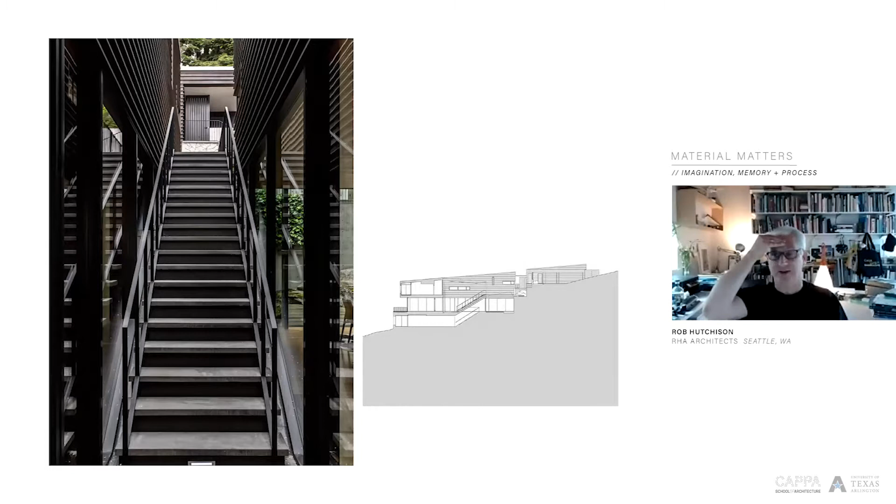As Pia mentioned, we've known each other for a long time. What I wanted to do was have Pia and I talk for an hour about a word, because she and I can talk for five or six hours about a word, and we have done that. But she gently reminded me that the point of this is a lecture series where people talk about their work, and hopefully more specifically talk about the topic of material matters.

I was pleased she was open to defining what material means, because while of course we use materials, and material is important specifically as a literal word in building architecture, I'm much more interested in expanding on what that word might mean. For us specifically, the material that matters in our practice is process.

Through Pia and I talking for many hours, like we like to do, she helped me come to a way of thinking about and framing this lecture with the title Imagination, Memory, and Process — with the idea that I'm very interested in memory, and how memory is fundamentally important to what we make and create, how memory and process together lead to imagination, which is what we're putting out there that results in work. Hence the topic: imagination, memory, and process.

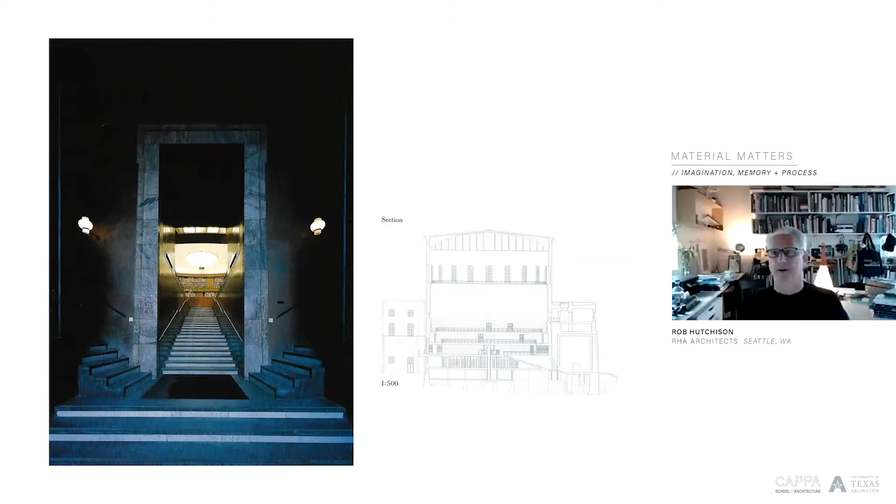To create this sort of main living space. And if you turn around, you'll be looking at this amazing view of Lake Washington. And what I love about that is that somewhere along the line during the process, Tom and I realized, and it might have been after we built this project, that Gunnar Asplund's Stockholm Library, which is such an incredible building, is really the idea or the source of that scheme.

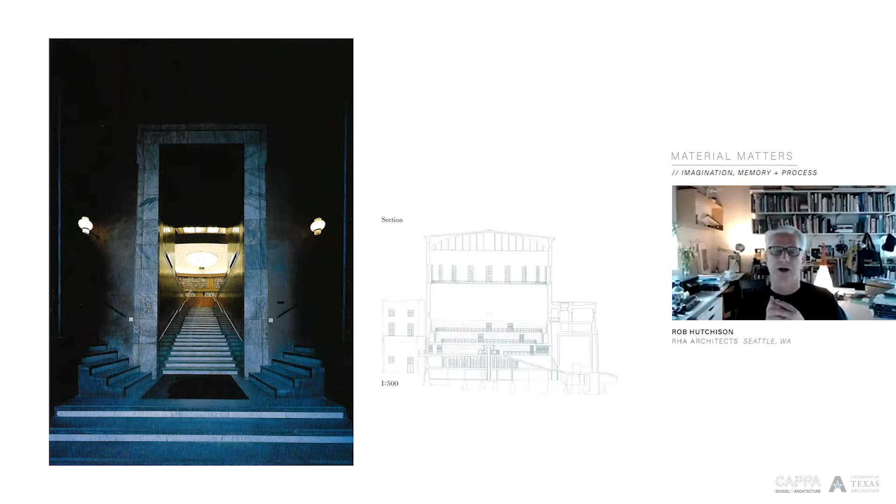If people don't know this project, and by the way, I should have said, I definitely set this lecture up to try to not talk to students, but really try to - I am teaching right now as well, so I think all of my students are in this presentation. My colleague Elizabeth Golden's students, I think, have joined, and I love the fact that UT Arlington students are in here as well. So Pia and I talked about this, of course I'm going to talk about my work, but I'm also talking about process because I think it's important to how we talk about design, and how we go from one point to another.

This building was definitely an important moment for Tom and I, or I don't know if it's a moment, but it was instrumental in generating this idea of the project, or the direction and motivation of our own project. And what you're seeing in the section, which is probably entirely too light for a lot of people to see, is the main entry into this building, looking up a very long gradual stair into what you can see is a huge room.

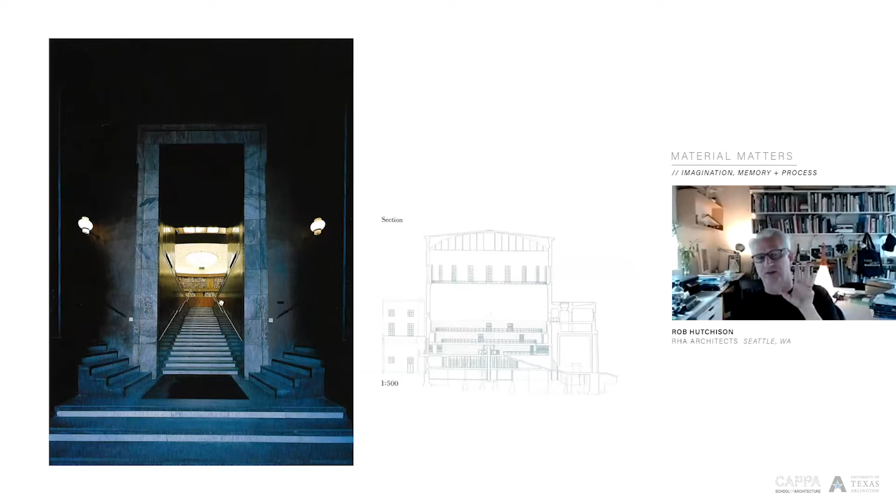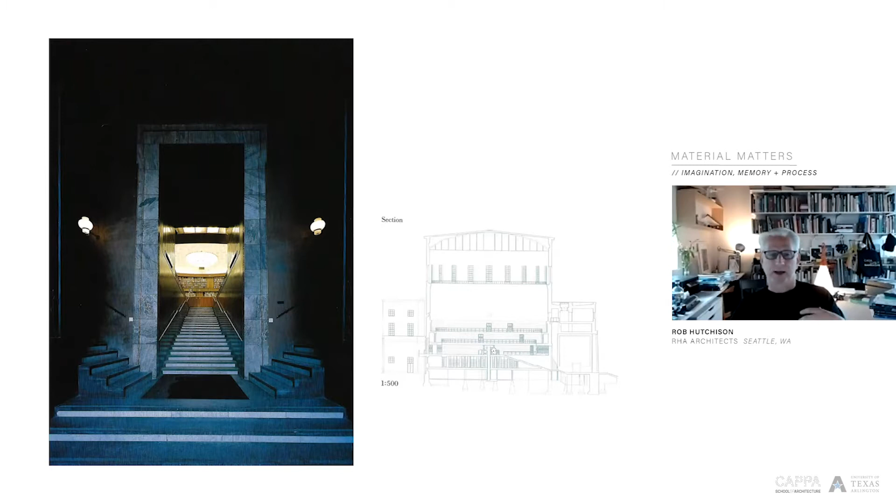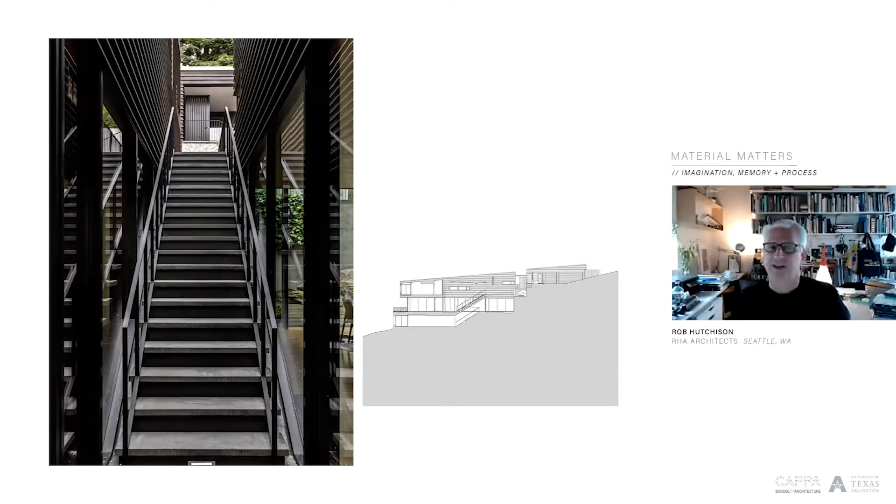And in the section, the stair is right here. And what's beautiful about this building is you actually arrive at the middle of this huge, amazing library room. And what we did is we sort of inverted that idea, and we said, well, what if we arrived in the middle? What if we came down into the middle of this house? And I've always liked the fact that I don't remember when we realized that. It doesn't matter if it was something we were conscious of, or if we realized it at the end. What's interesting to me is that I think that there really is a strong connection to that building.

And it happened again just last night as I was putting all these slides together. I really love this project that we just completed with my best friend, Javier Sanchez, an amazing architect working out of Mexico City. He and I collaborated together on this project from start to finish. It's a house outside of Mexico City, up in the mountains. And he and I actually just did a lecture together for Casa Barragan, and we talked about the influence of the obvious

Case study to look at, or that we did look at and have visited together, or not together, but visited in person, Mies van der Rohe's Farnsworth House. And when I was looking at these images and starting to think about the influence and impact of Scandinavia on me as a student, because I spent 4 months in Scandinavia when I was a graduate student at University of Washington

25 years ago. And that experience was fundamentally important to see the work of all of these incredible architects and buildings. And what I realized last night was we really also created, or recreated, reinterpreted, translated, transcribed, Sverre Fehn's incredible Schreiner house, one of his first houses that he ever built in the early 60s.

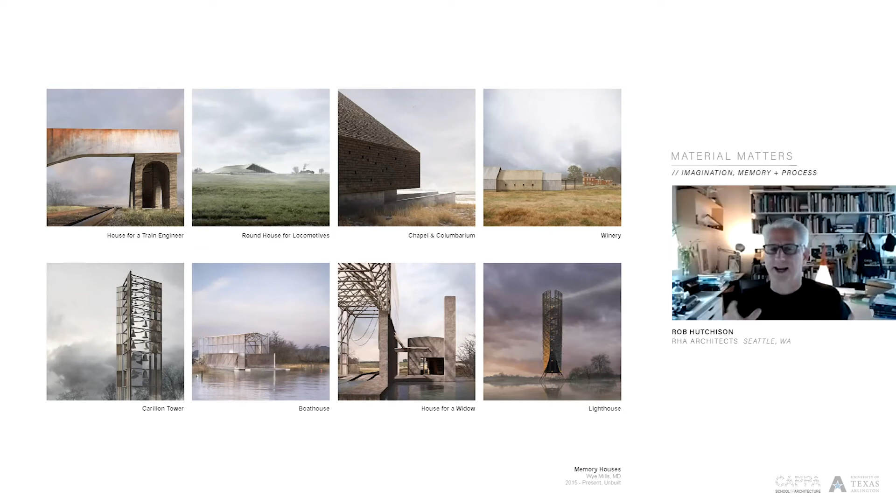It is all fictional or speculative designs, 8 or 9 designs for 8 or 9 buildings that are all on one site. And this site is real. All of the buildings are speculative and fictional, but the site is very special to me personally. The site is in Eastern Shore, Maryland.

The reason why this site is important, and this is sort of the beginning of the Memory Houses before I knew that it would be the Memory Houses project, is that when I was in graduate school in 1995, my father had planted vines on the site. He was a huge wine fanatic, loved wine. I grew up in Germany as a kid, and that's where he fell in love with white wine especially.

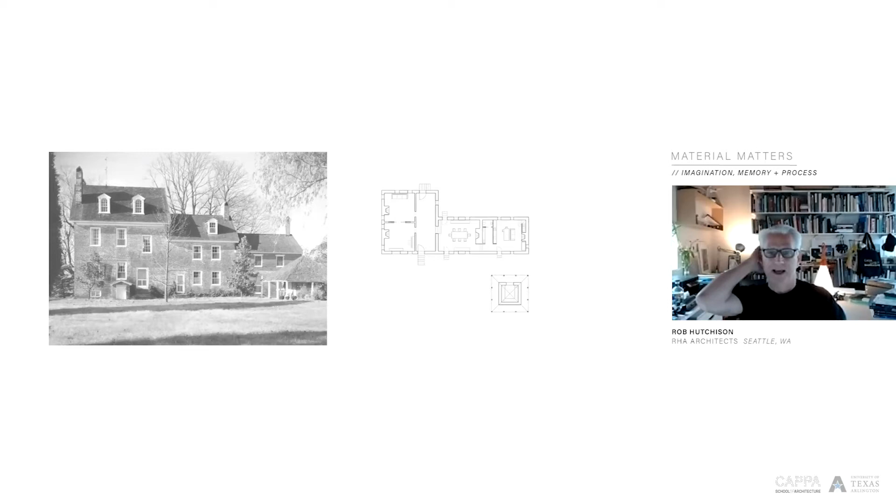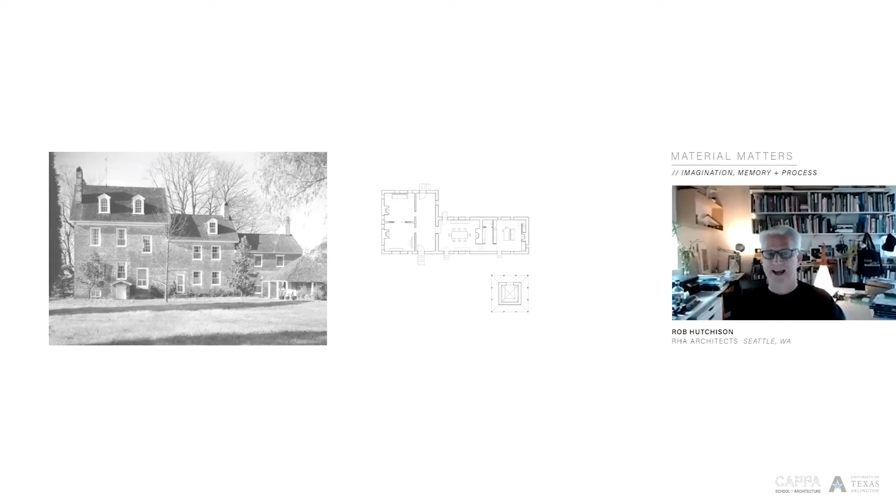The telescope house is a typology that you see pretty often in various locations along the eastern seaboard. It's called a telescope house because most of them are built in phases. Ironically, this specific one we understand was possibly built first as a tiny little kitchen, then they built the much larger portion of the house, and then they actually connected the two. But nonetheless, especially in its massing, you can see this very clear telescope typology, which for me as a student was just so cool.

And I was somehow okay with making that reference in this building. I think what helped me was that my dad was really interested in the process of wine, and I wanted to give each one of these processes of wine a place in this larger building.

The other thing that he really wanted was a tasting room. I didn't want to do a tasting room, but he really wanted the tasting room. So I designed a tasting room, which you see in plan here, and it's maybe a little hard to tell, but in the elevation, you can see it's a shed building, sort of reaching up towards the views overlooking the water.

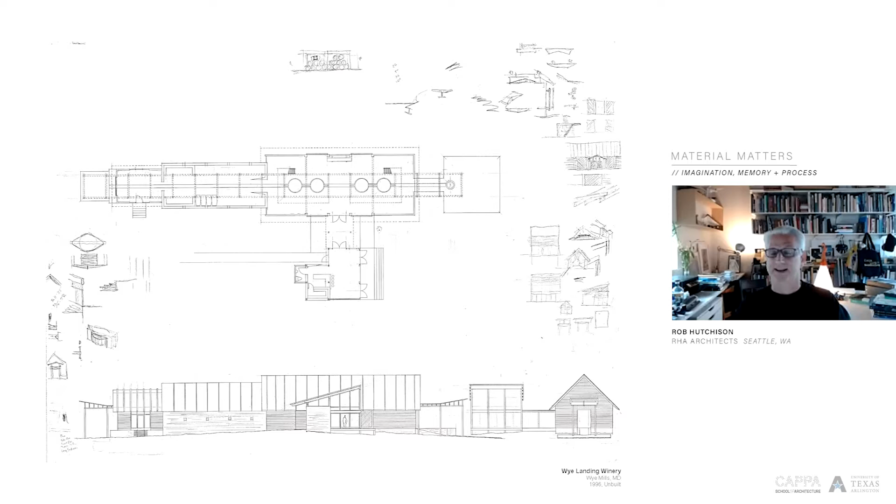And I always found that tasting room problematic in the grand scheme of things. Without going into it, I didn't need to worry about it because very quickly the project died. This building never got built. So that's fine. It didn't get built.

And then you go 20 years later, and my father is 20 years older and becomes very ill, and very quickly starts to suffer from memory loss and dementia. My parents are out on the East Coast, I'm in Seattle. And if anyone in the audience has dealt with dementia or memory loss with a loved one or family member, it's a pretty crazy time.

In some ways, what was interesting about this experience—well, I don't know if interesting is the right word—but I can speak for myself that what was strange was that I was 3,000 miles away. So in many ways I was sheltered from a lot of the stuff going on, whereas my mother and my younger brother were dealing with things on the ground.

But at the same time, I had this weird, strange experience where, between the 2 to 3 months between times that I'd gone back, my father did not see me in the same way that he had when I was there before. In some cases I wondered, did he even know who I was? Whereas people that were close to him, obviously because they're seeing him every day, there's a connection that is maybe held on to longer.

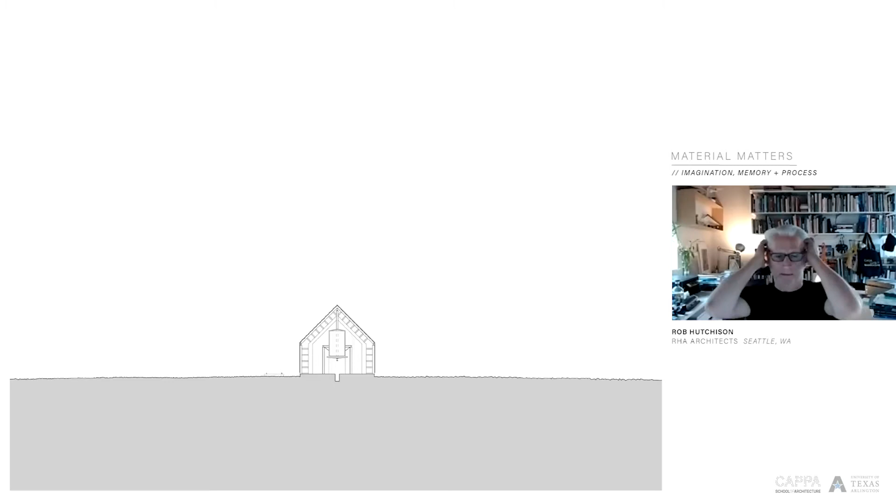So anyway, long story short, this was this crazy time for our family, and I'm out here trying to figure things out. And somehow what I came to was that maybe what I could do was start a project again.

The general idea was, could I pick up this project that I'd always loved and that he and I did together, and could it perhaps be a way to have a conversation with someone that you can't have anymore? Because you can't pick up a phone—if someone doesn't really know who they're talking to, it's a little hard to call them and talk.

Not sure if that makes any sense even now, but that's what was in my head. And I thought, well, what if I address this tasting room that I hated—or not hated, but never was resolved with—and what if I come back to this winery building that I've always loved and create a new project? This is the section through the winery building.

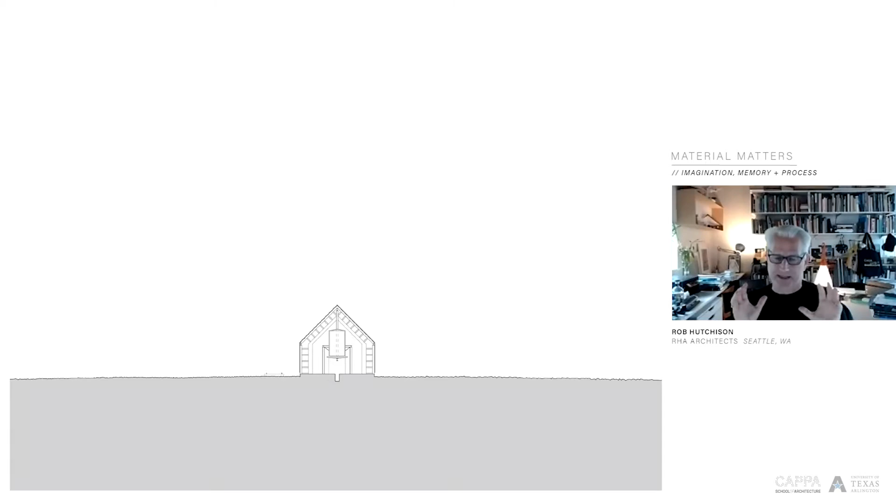What was interesting is we sort of pretended that this building actually existed. We made a rule set in the studio—this came right after I started designing the new building next to it—and one of the rules was, let's pretend this building exists. That meant we couldn't touch it. It had to stay exactly the way it is.

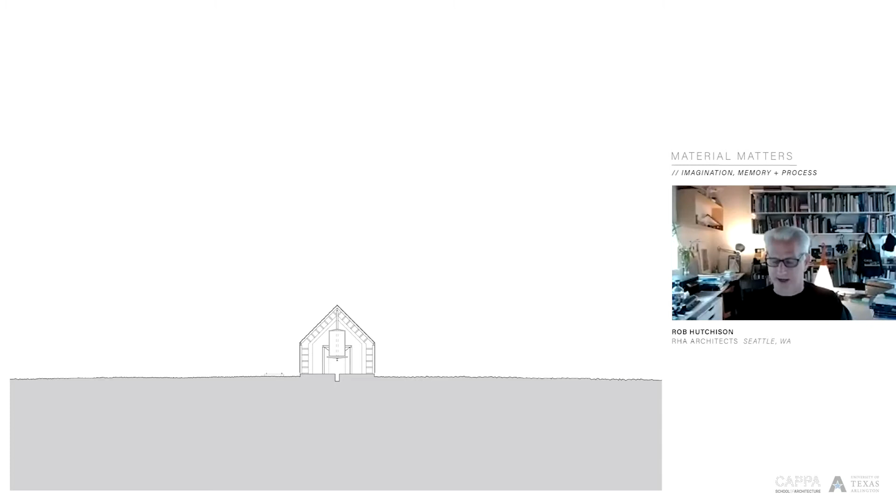And what was interesting 20 years later is that now I've got 20 years of, quote, experience under my belt, and I feel maybe a little bit more clear regarding my intentions and what I'm interested in. For some reason, I had no problem at all just accepting the obvious fact that what I needed to do was a pyramid-shaped building next to this winery building.

What became also interesting is I started thinking about program—like, what would this building be? I started thinking, well, what if it was a chapel for my father, a memorial chapel, and a columbarium for the family? A deep dive right into interesting programmatic issues related to a winery building.

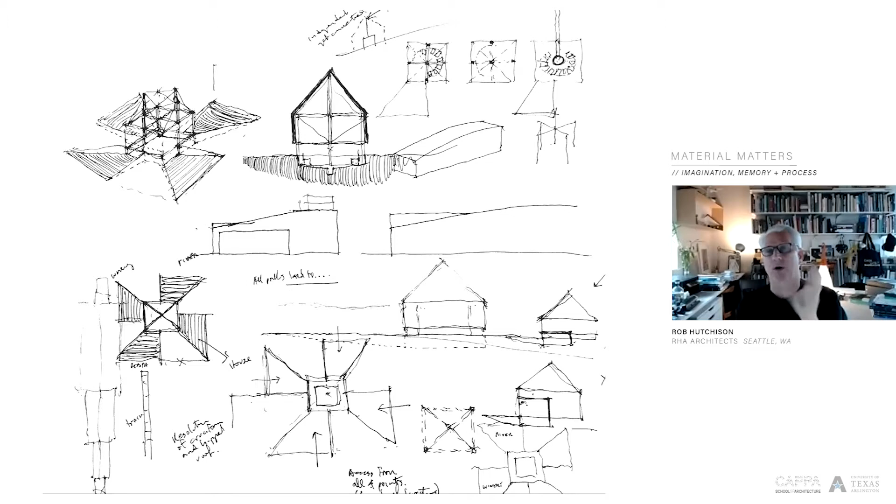But somehow all this stuff clicked together very quickly. These are a few of the early sketches starting to think about what this chapel and columbarium might be. Actually, you can see it's a little hard to tell, but—oops. Right here you can see the relationship of the chapel to the winery building. The winery building is barely sketched in.

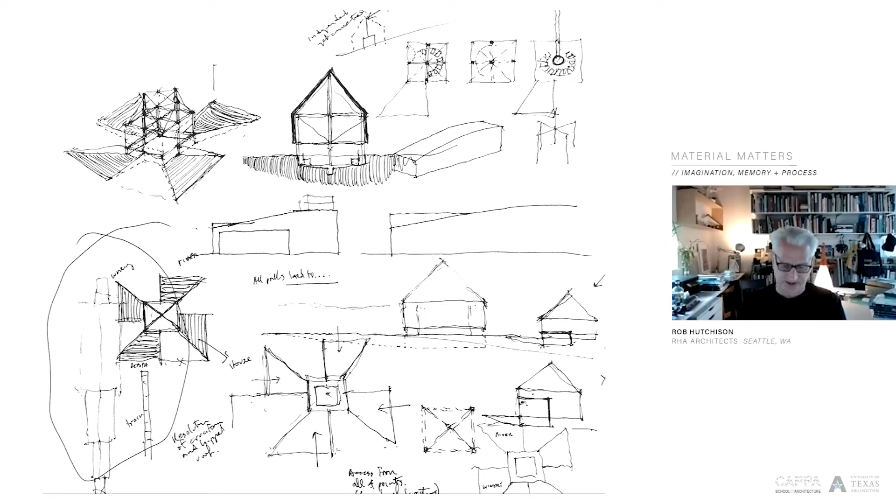I just think, looking back on that, it's sort of interesting that it was so obvious to me now. I recall very clearly, it was something I did not want to do at all 20 years before. But suddenly now I think there was this very interesting relationship—there already was an interesting relationship between these two existing buildings on the site. I was trying to create a relationship between two buildings adjoining these two buildings on the site.

And so I think that dialogue became quite interesting as we moved forward.

Here you're seeing a very rapid succession of events over 2 days, where I quickly drew a working drawing of the section of that chapel and the subterranean columbarium. I don't have time to go into all the nuances, but you can see the obvious reference to the milk house on the right with the pyramidal chapel, and on the left is the winery building.

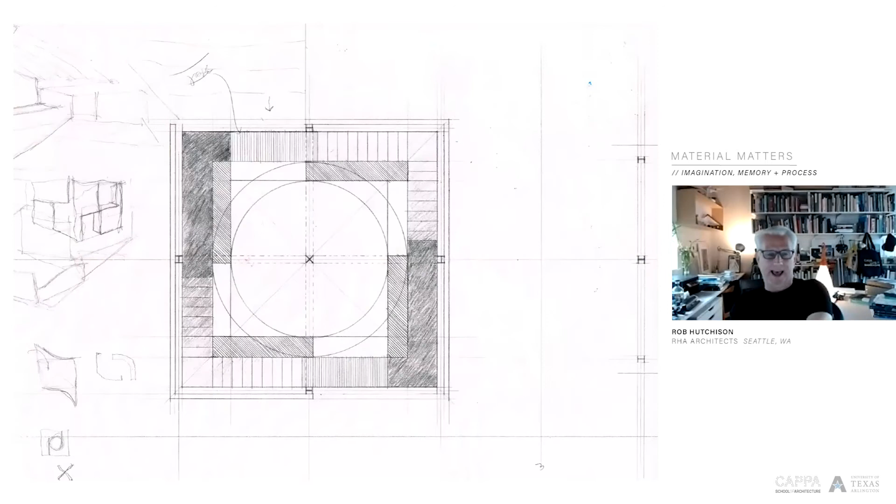And also a very, very simple square plan relationship to the milk house.

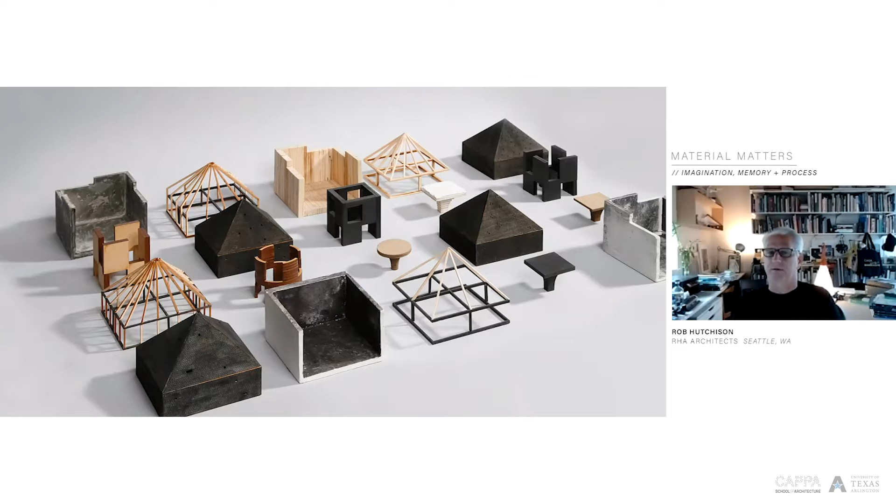What was interesting is once I got to that point, I started opening this up as a conversation with my office, and we all got on board with that. It was like, let's just define the constraints here. This was not a formal exercise for us—we felt very compelled that we did not need to explore formal options for this building.

Instead it became all about investigating the different pieces and material options for these pieces and how they might relate to each other. Here you're seeing some conceptual models exploring the relationship of the steel frame to the wood framing of the roof.

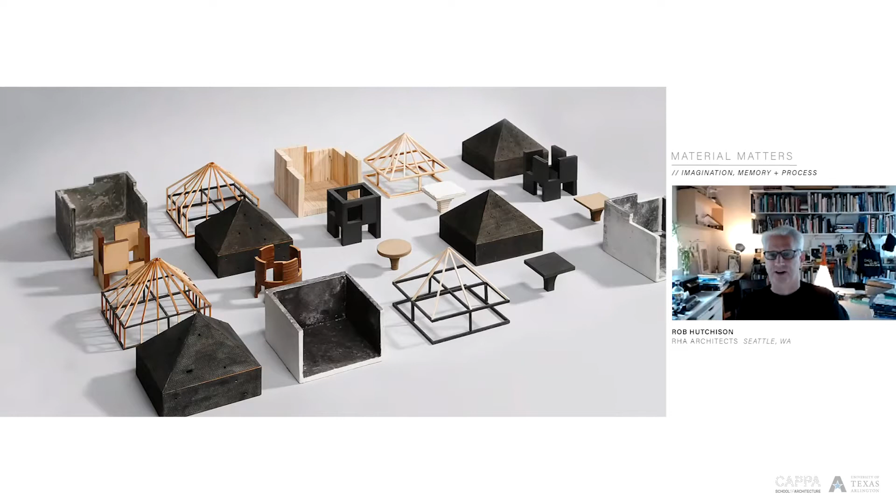The steel frame is there so it can cantilever out across the site, which you'll see in a minute. You're seeing the concrete internal piece that we also considered as brick—a lot of different material investigations here, while the formal relationships had already been established.

And then not just thinking about what those things are, but how they relate together as a whole. This is an exploded axonometric showing all the little pieces. I love this exercise because as a team, through long conversations, we came to a true understanding of what this building is, even though we knew it would never be built.

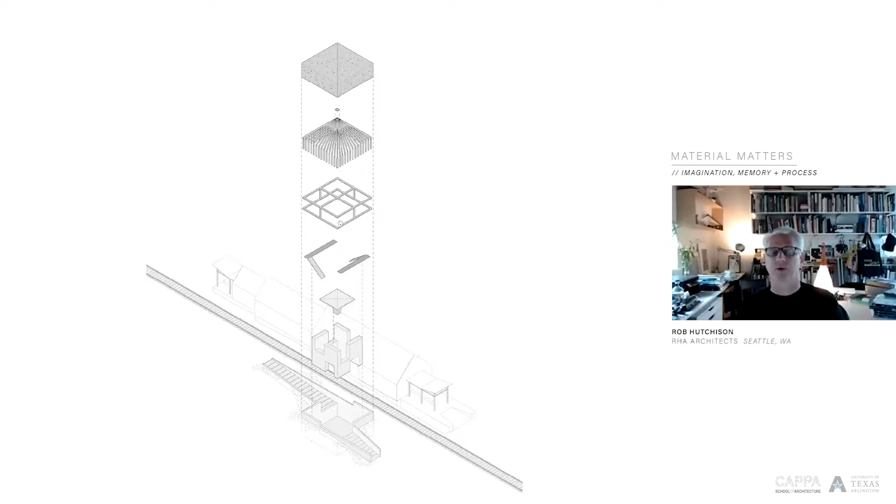I think there's something interesting about taking something to the level where you know it could be built. It's hard to see on your screen, but this tiny little square above the hip roof building is the steel compression ring for all these members to attach themselves to.

Again, at least for this project, maybe the culmination or realization of the project was the physical model—in this case, a section model that really explored the materiality and assembly of this building, and through that, the spatial qualities and light qualities coming into the building.

Out of this, we started talking in the office about what is architecture—when do you go from model to architecture? That established, 5 years ago, an ongoing discussion about scale and at what point does something stop being a model and start being architecture. For us, this was starting to be architecture, partly because we knew it would never be built.

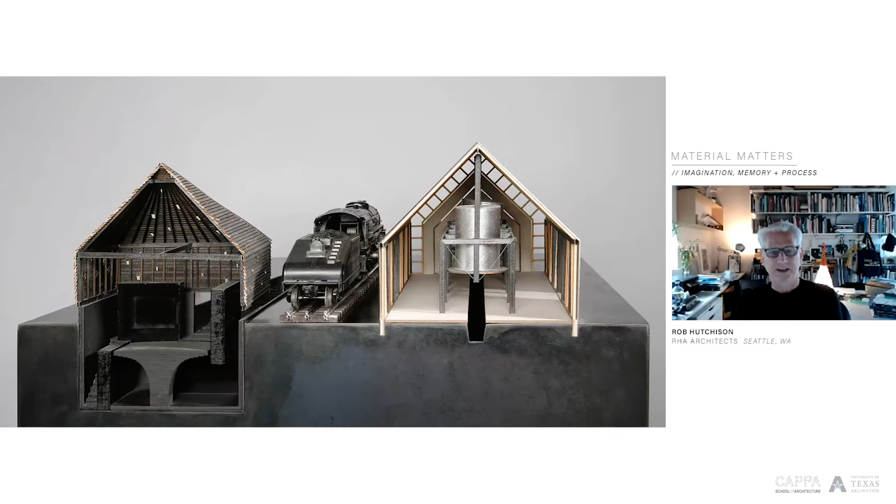The other thing I love about this section, in both the model and the drawing, is that Pia herself has talked about this section as being interesting in the sense that it's almost about turning the building down into the ground, really rooting it into the ground—which I had never thought of that way, and I like that idea. I'll expand on that a little more in a few slides.

But coming back to this idea of memory and references, what was interesting for this project when I started designing the chapel was that I immediately had a very clear reference in mind as to what I was trying to connect to—seeing these incredible stave churches in Norway when I was a little boy. My parents took me and my brothers to Norway when I was probably 4 or 5.

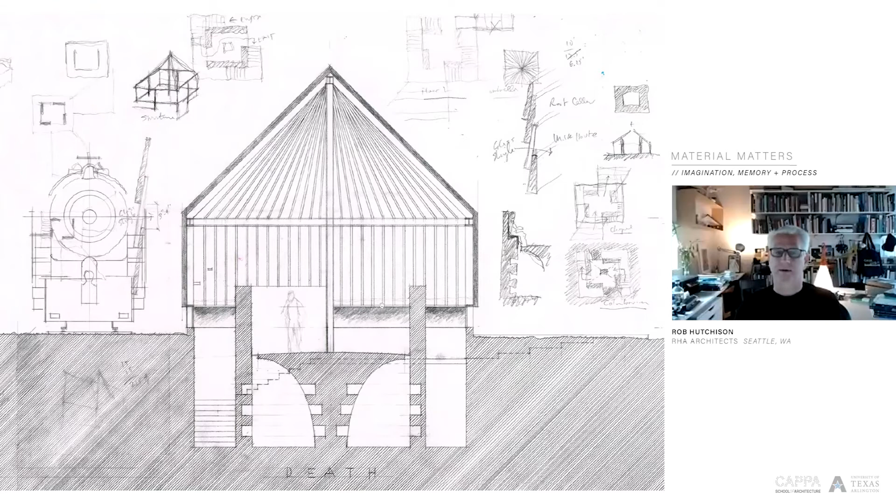I was able to see these when I was in Norway in grad school, and the amazing thing is how low those eaves are. So you can see in the design of this chapel, here's a person standing, that even when they've stepped down to the top of the columbarium, when you're standing you still do not look out to the horizon. You only look out to the horizon when you sit down and then look through the space between the hovering shroud and the foundation itself.

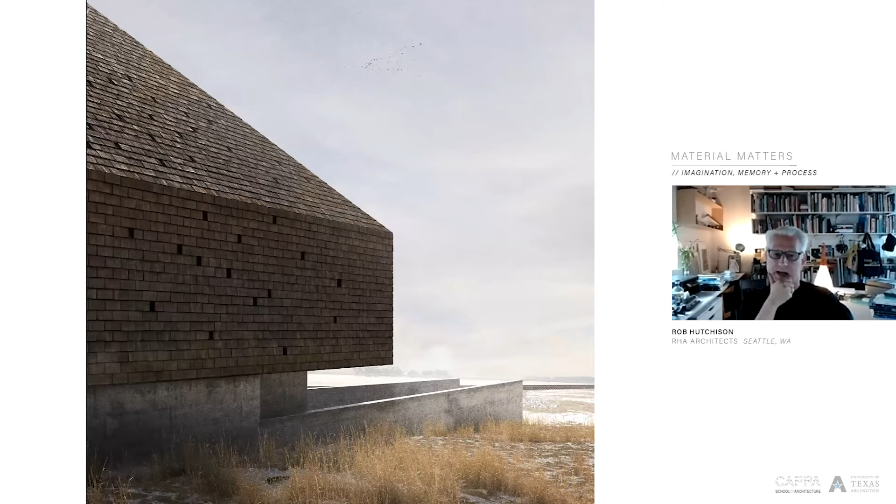Which you're seeing here in this exterior view. So I was really conscious of those buildings as guiding the design of this chapel, even down to a material quality.

But also the quality of light on the inside is pretty astounding, completely because the buildings are all wood. This photograph actually, I think, shows these spaces having more light than they actually do. When you step inside of these, they're almost pitch black, partly because you've been outside in the daylight, and then suddenly you're immersed in this dark building.

But the exterior and interior of these buildings had such a strong connection to where I wanted this project to go, which here you're seeing in another render. The renderings I'm showing were done by Tristan Walker, who worked with us on this project.

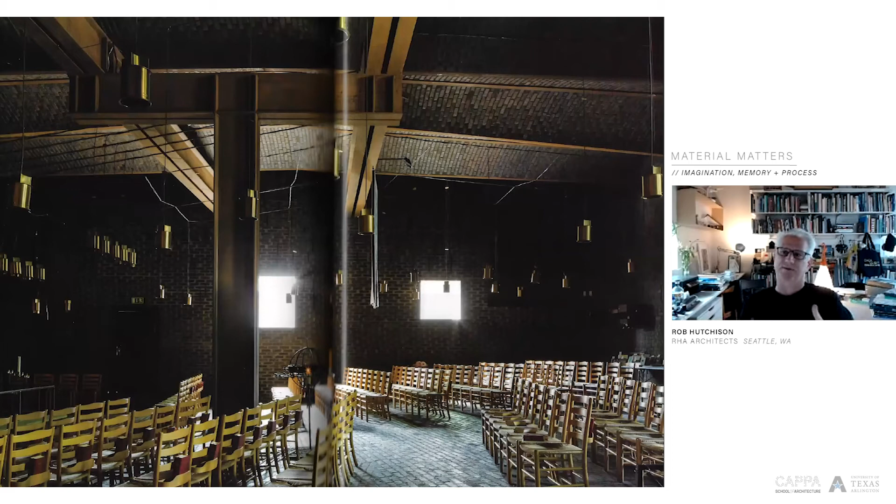And then as I was thinking about this presentation today, I couldn't help but think of other references or memories I've had more recently being in Scandinavia—Sigurd Lewerentz's incredible final church, St. Peter's.

Pia wrote a beautiful essay for my book, along with several other really beautiful essays by other close friends. I really love the title of the essay she chose, which is 'Remembering Forward.' I just like that title. I like the idea of remembering forward.

And it made me think about how after this chapel had been designed and finished, when we were done with the models, I was hired to design a house directly next door to me. I'm looking at it from here—it's 10 feet away. It's a small, 800 square foot backyard cottage.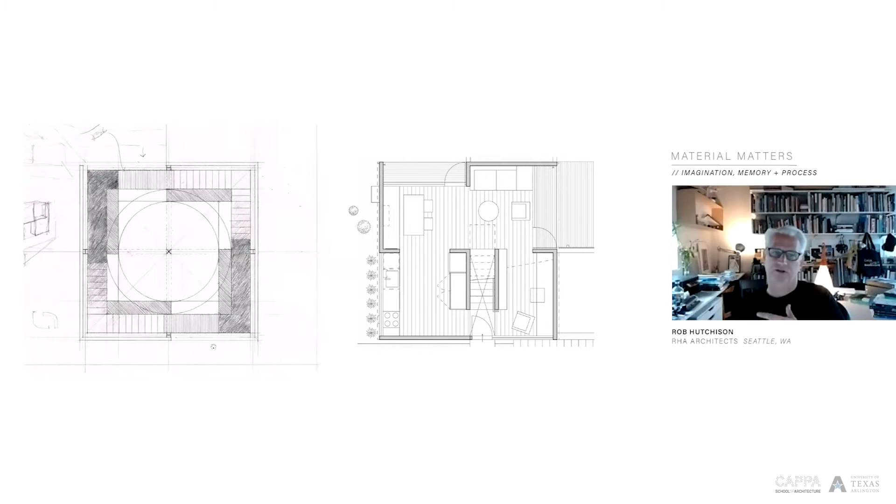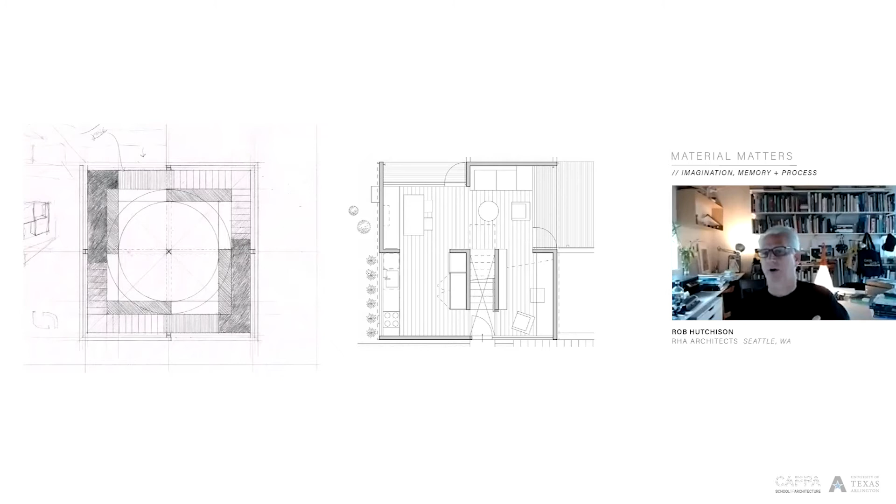In the case of the house next door, you actually come in pretty much centrally on the house, but then the stair separates the building into four quadrants, and the rotation occurs through the way we deal with apertures and the relationship to the outside, such that you have four relationships to all four cardinal directions of light.

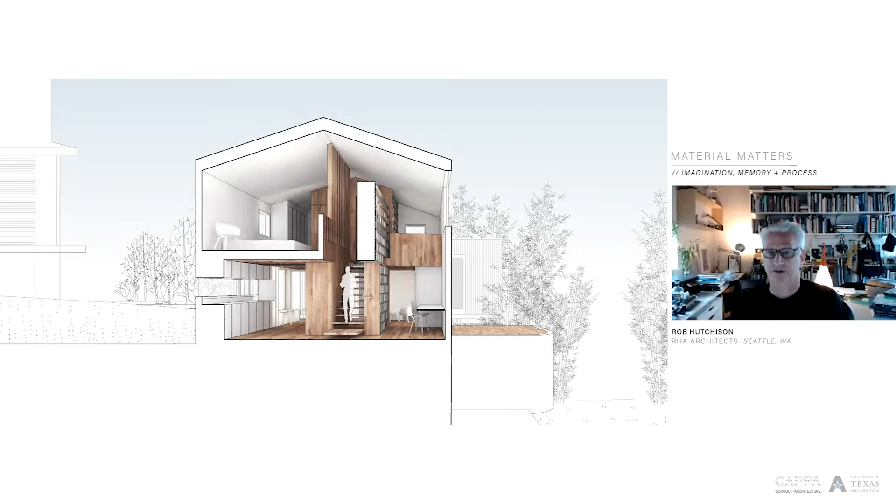Pia pointed out an inverted relationship between this building and the chapel. The chapel has a very strong rooted connection down into the ground, while this one has everything on the interior like a tree that clambers up inside a two-story space, branching out and lightening as it goes up to the ceiling.

I have two images I threw in here. This is right after you have arrived. I love the efficiency of this plan, because when you enter the front door, you can go upstairs, go left into the kitchen, go right into the double height piano room, or turn around and go outside.

Then when you get up to the top of the stair, you have arrived in the center of the house, similar to the first project I showed, and you have four choices again. You can step up into the bathroom, step up to the left into the bedroom, step up to the right into the den or office, or turn around and go back downstairs.

So there's a super hyper efficient floor plan that took a long time to develop. But I really feel strongly that the only way we were able to get to that was by actually designing a chapel in the first place.

I have to watch my time. Right, Pia? Yes.

So I'm just going to keep going with this notion of remembering forward. And I love that about this chapel, because it sort of kept going.

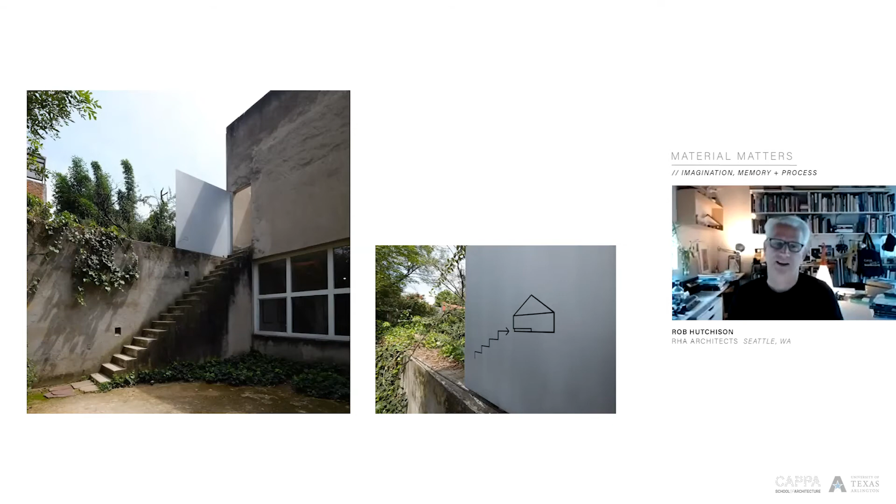So we asked Catalina, the director, if we could build it on top, and she said we could build it on top of the roof. What's pretty interesting about this installation is that we wanted to create a half scale of the chapel, but we also wanted it to be almost like a ghost of the chapel, like almost a memory of the chapel that would never be built.

And by this time, my father had passed away. What was interesting is we're always looking at artists' work.

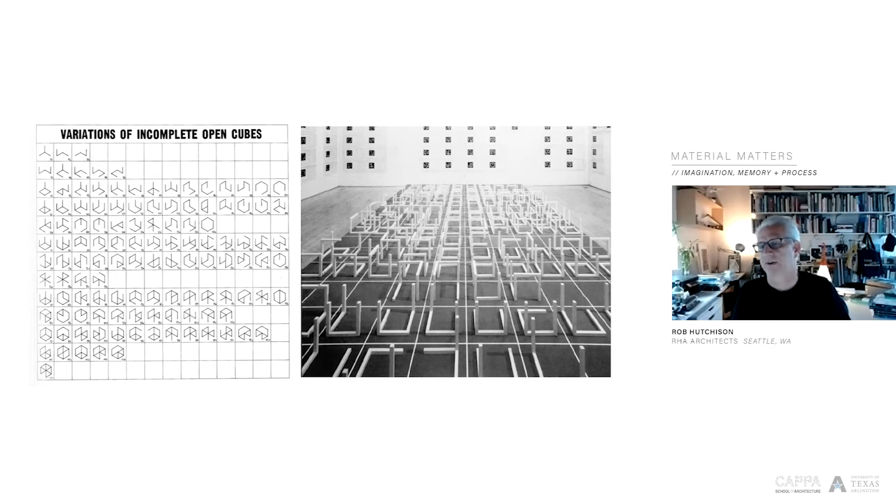Sol LeWitt is a huge influence of ours, especially in a number of installation projects we've done. I've always loved his project, Variations of Incomplete Open Cubes, where he looks at every single different variation you could do to a cube without actually making it a cube. So borrowing from that idea...

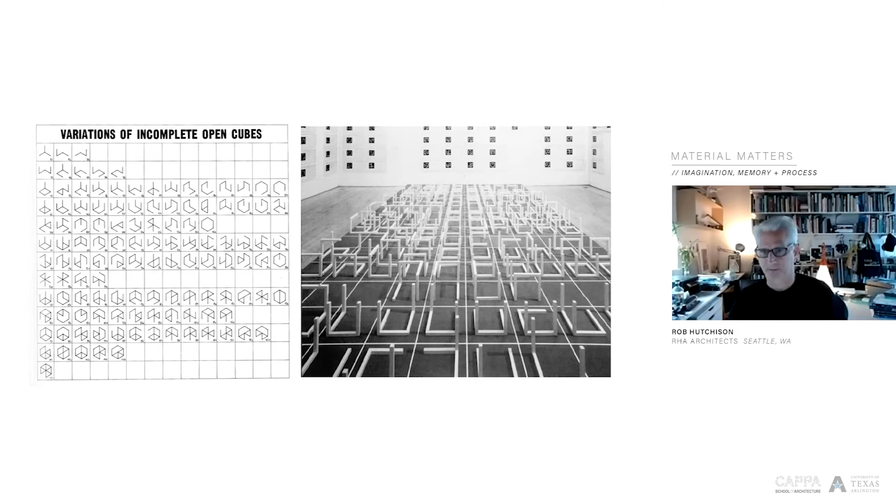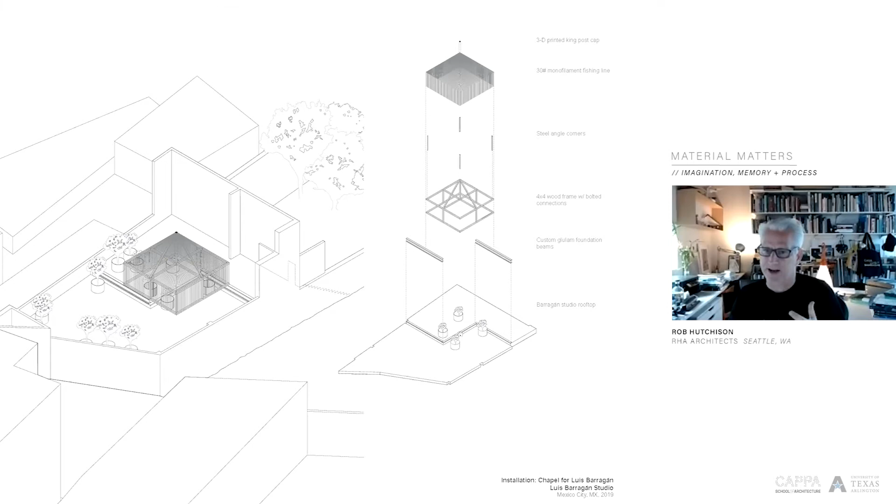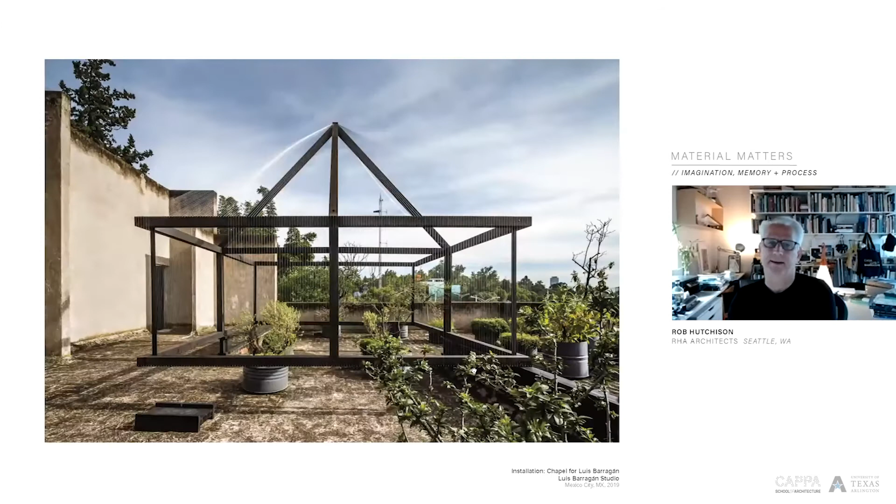We proposed only a frame, a timber frame on the rooftop that was hovering above the rooftop itself. We tried to construct this frame to be as minimal as possible, so we got rid of all the corner columns. We put in a foundation beam that sat on the curb that allowed it to hover out over the rooftop, and even the roof beams were minimized to only the points in line with the columns.

So it had this actually pretty interesting structural solution that allowed the loads to make their way back to only two points, again an asymmetrical floor plan. Here's one point for the bearing, and the other point is back in the corner here.

We really liked the idea of a ghost of a chapel, and we clad it in a material we've actually used before in installation projects, a monofilament fishing line that sort of became the way of completing the form of the chapel.

You can see right here is the hip roof, but depending on your vantage point and when you're walking around it, sometimes it would completely disappear. So there is a sort of quality of emergence and disappearance happening in the installation.

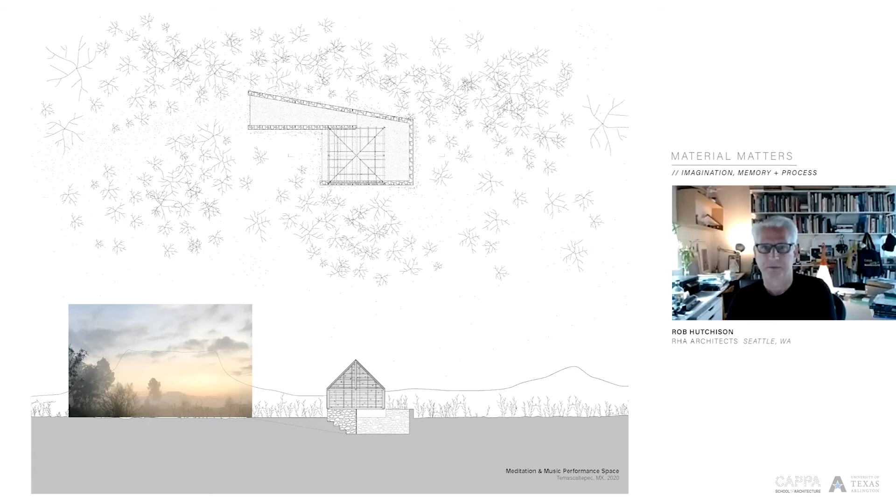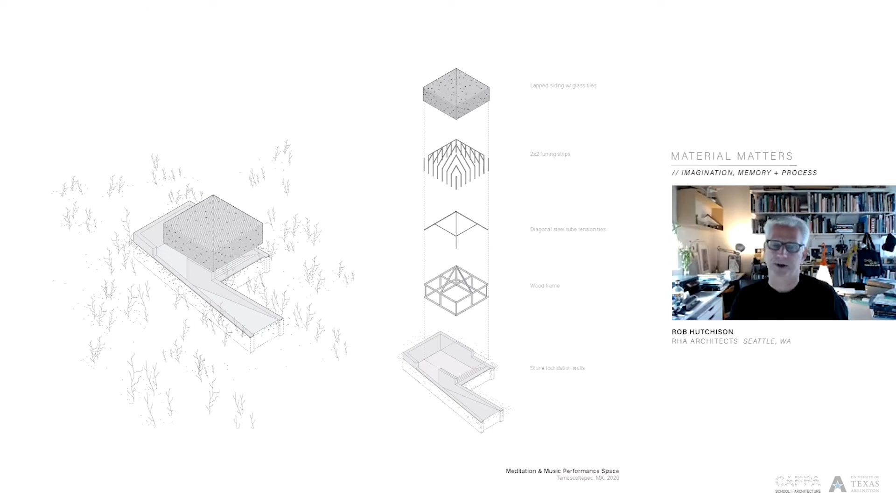This was a proposal to rebuild the frame as a meditation and music performance space on the site. So there's this ironic condition about this project where we set out to not build a building, and yet we ended up building a temporary half-scale version of it, which ultimately possibly will become a real building on a site—reusing the frame, but cladding it with the very same idea we had originally for the chapel.

We're actually starting to lean towards the idea of this as a mushroom building, which I'm sort of excited about.

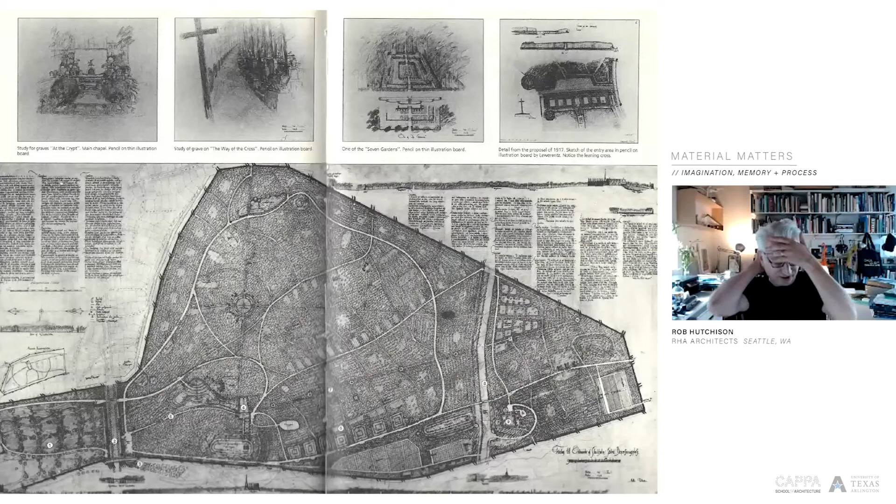Transitioning, before I go into the second memory house, I wanted to step back and talk about the site, because I think how the project developed after the chapel was quite interesting. We designed the chapel with the idea of just doing it. We built the models and we thought we were done. My father passed away, and then right afterwards, we were talking about the project.

Other ideas started coming up about other buildings that could occur on the site. As we talked more and more about it, we became interested in just seeing where it went. I use this word 'trigger' a lot, especially with students, and Pia and I have talked about it. I like the word trigger because it comes from Hugo's Triggering Town book on writing—this idea of letting whatever comes into your mind become a way to create poetry. I believe that process is about honoring anything that comes to our table. Of course, just because something arrives doesn't mean you accept it, but it's in play.

I'm trying to think where I was going with that, but...

What became interesting was thinking about the greater site, and how, as we started designing different buildings on this site—actually maybe I should go to the site plan itself. Where is it? Sorry, my computer seems a little slow.

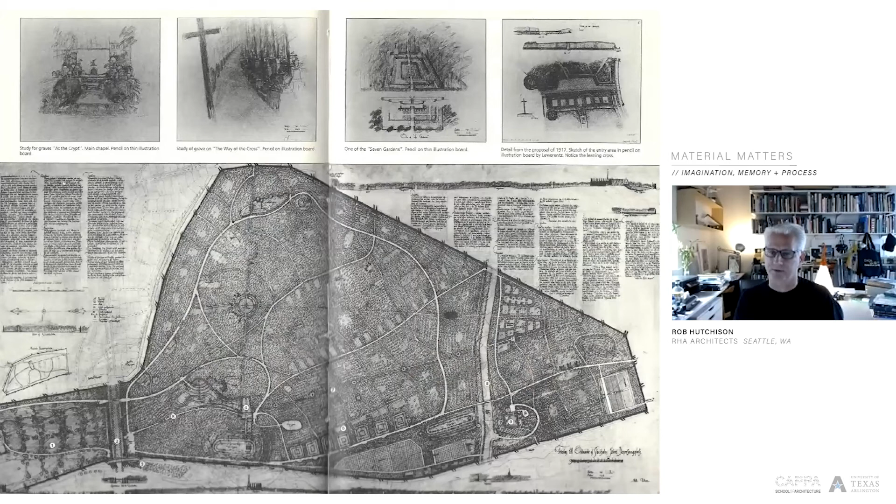There became some intentions regarding providing separation between all the buildings. We didn't want—well, obviously these two buildings have a close proximity, but the other buildings had intention regarding why they were separate. The idea of those buildings and how they related to each other, this idea of site and narrative and a way of walking through the site, very clearly comes from Lewerentz and Asplund's Woodland Cemetery, which is such an incredible experience to go to.

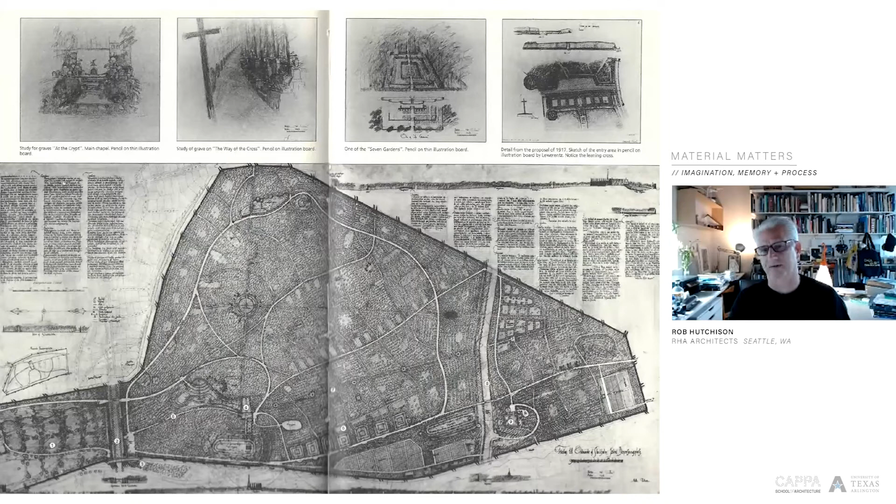My wife is not an architect, she's a graphic designer, but when we went there, I still remember we walked around and went through all the different areas of the site. As we were leaving, she said, 'You know what, I think I want to be buried here.' It's such an amazing place to just be in.

It's very much about narrative and thinking spatially about landscape as space. I think Luis Barragán famously said that landscape architecture is architecture, because it's all about spatial sequences and thinking about how you move from space to space. And that's clearly happening here.

He wanted you to enter the building and exit in a different way. I think that relationship between interior and exterior, sequence, and thinking about buildings as extensions of the site was something we became very interested in. Our project has clear references to, and is indebted to, the Woodland Cemetery.

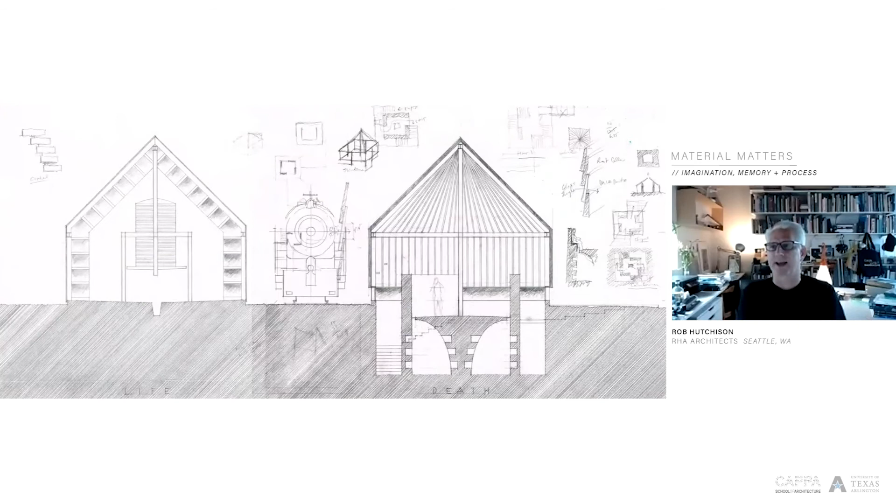Our way of trying to make connections directly between these is maybe a little bit weird, but we ended up connecting them through a train, a railroad that does not exist on the site. The train actually arrived in the chapel originally, in the original drawing, where I started wondering how people get to this chapel or to this winery, or how the wine gets away. I wanted one way to get in and out, a funerary train to bring the ashes of loved ones to the chapel, and I wanted the wine to leave on the same route.

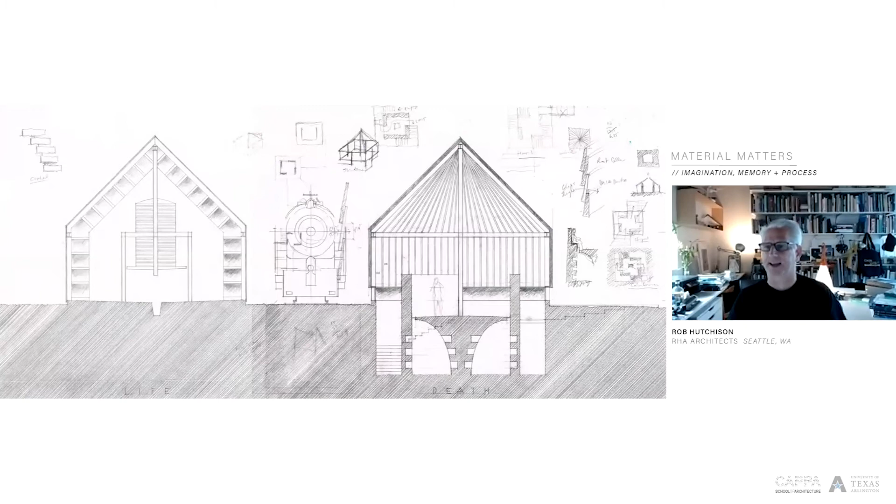My father was a huge model railroad fanatic, which had a lot to do with this decision. What's interesting is it gave us a way to think about how these buildings are connected, all the way down to the boathouse and the house for a widow, which then turns into a model or marine railway to take a boat across to a lighthouse, which we don't have time to talk about today.

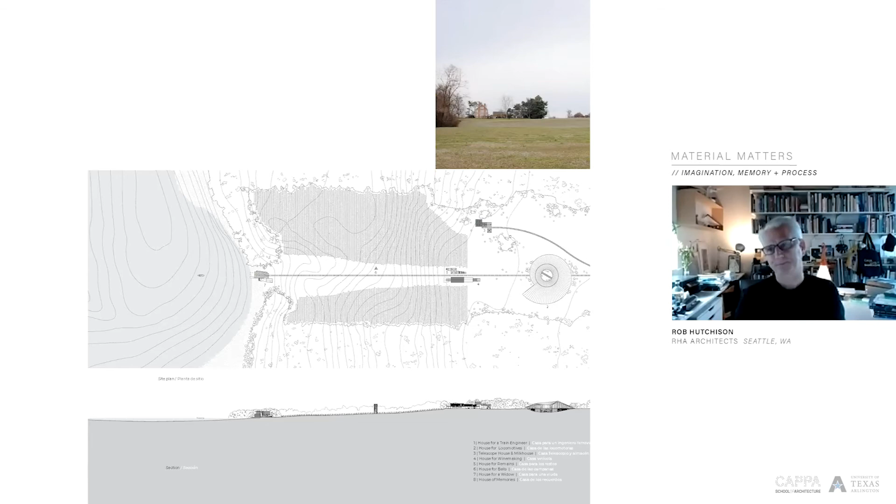But because we have a train, it then allowed us to think, well, where do the trains stay? Where's the house for trains? This project was a little bit of boom, boom, boom, stuff all over the place, and us getting excited about things and just letting that happen.

But we did start to really think, interestingly, about roundhouses as a typology. We became interested in what a house is. What does it mean to be a dwelling? What's the difference between a house for trains and a house for people? And of course, the geometry that is so fascinating about roundhouses.

Luckily, I happened to be in Rome at the time, at the Academy in Rome, and was starting to work on this project in detail. We had an exhibition coming up, and I had to design 4 buildings while I was there. The roundhouse was a perfect thing to think about relative to Rome, particularly these centralized plans.

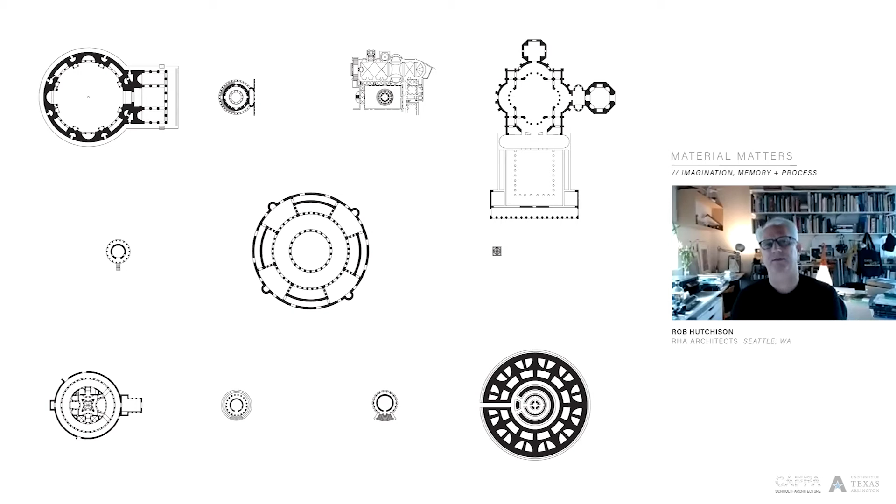My staff in Seattle created all of these drawings for me, going online and into books, drawing these and scaling them so we had an understanding of how big they are relative to each other. This is Trajan's Column right here, the Tempietto. Really thinking about these spaces, but also drawing them, but also being able to visit them was such an incredible experience.

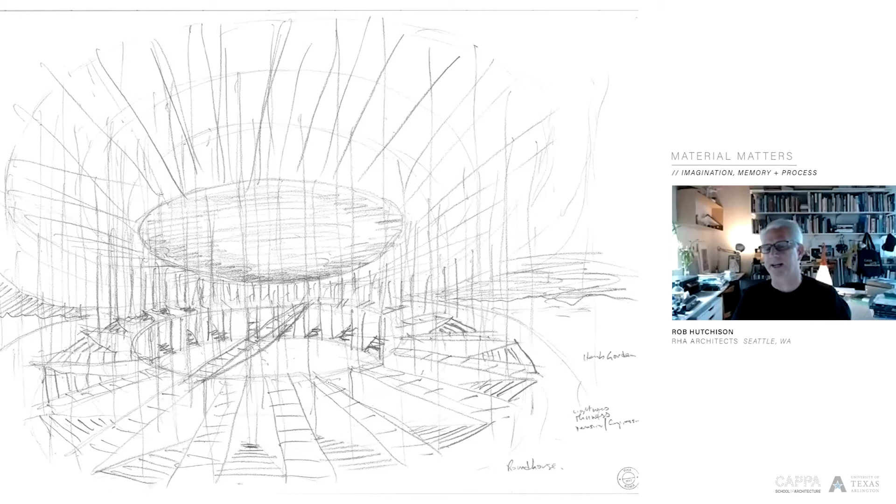Very quickly, I'm going to take you through the design sequence of this specific roundhouse building, where you're seeing early sketches of what this might be like. Very early on, we became interested in a subterranean condition that you would never see in a roundhouse. That's where we started thinking that maybe the trains are at the main level where they have to be, and that there could be a subterranean museum with model railroads.

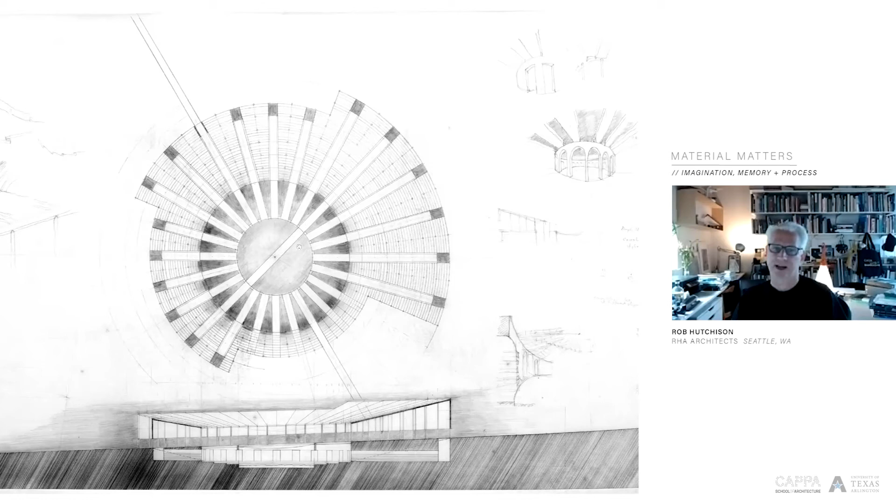Again, sort of a reference back to my father. This is an early section and plan that I drew in Rome, where you're starting to see that subterranean sectional condition and its relationship to the main level of the turntable. You're seeing where the trains can sort of park themselves underneath the roof, and then the hole in the ground down to the subterranean level with the round table that turns and is also a bridge to span over that.

The obvious reference that I didn't actually pick up on until I had drawn several plans is Santo Stefano Rotondo, which I think is probably one of the most amazing buildings in Rome. It's a little bit of a brave thing to say, but I just kept going back to this building. It really was an incredible experience to be able to keep going back.

For those that know it, there is a very intriguing arched wall right in the middle that bisects this central space. There's a raised space that then allows light down into the middle of the space above the altar. I couldn't help but think there are some interesting parallels to the roundhouse and the turntable that I was designing.

This was a challenging project, well, they were all challenging projects. On this one, the real challenge was the geometry of the roof and how we resolve it. How do trains get in underneath the roof? And spatially, how do we create a diversity of space? We wanted to create a different section all the way around this building.

It's not a very good scan of this project, but a very nice thing that helped us out was Hiroshi Naito's Makino Museum of Plants and People in Kochi, that I was able to see in 2010. Really incredible use of geometry, but at the same time, rigorous structure.

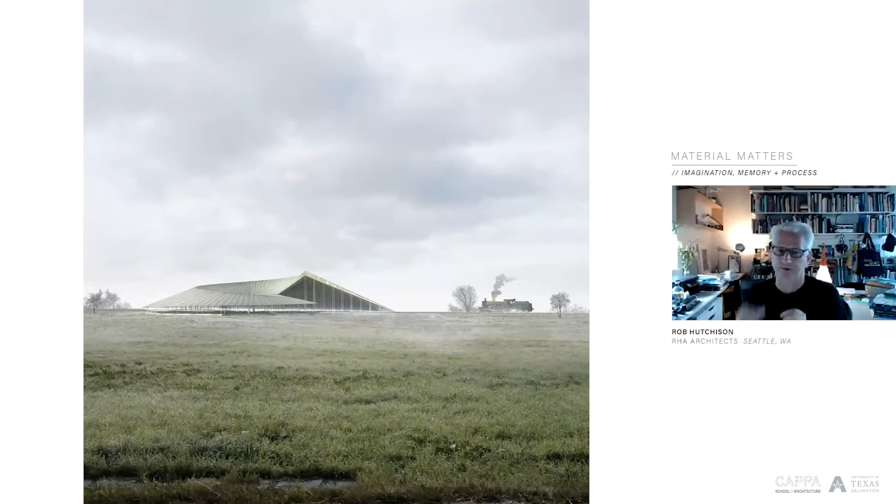Through that and the models, we finally came to the final project that you're seeing here. This undulating or changing section of a helical shell roof hovers above the landscape, held to the ground through a series of very, very thin columns. And then a view underneath.

One last remembering forward: I love that geometry had an impact on me, the simplicity of these incredible buildings in Rome, but also the incredible diversity of space through section. I couldn't help but think of this shortly after working with Javier on this beautiful site outside of Mexico that I've talked about.

There's a separate building we were designing, a bathhouse with 4 different spaces for bathing. The obvious reference for Javier and I was immediately Kahn's Trenton Bath House—a very rigorous floor plan, in this case a Greek cross.

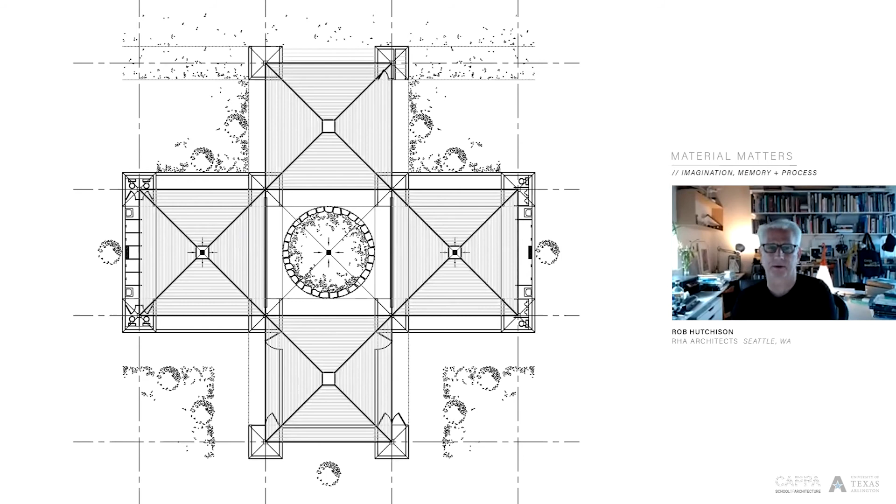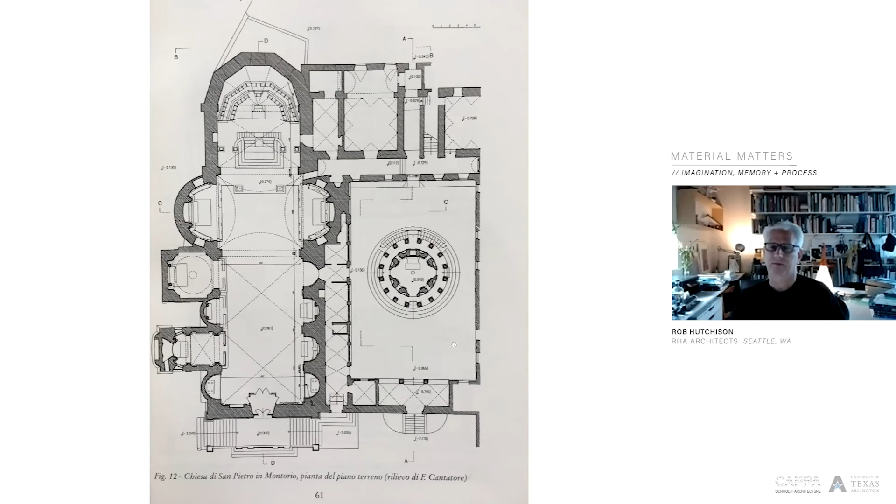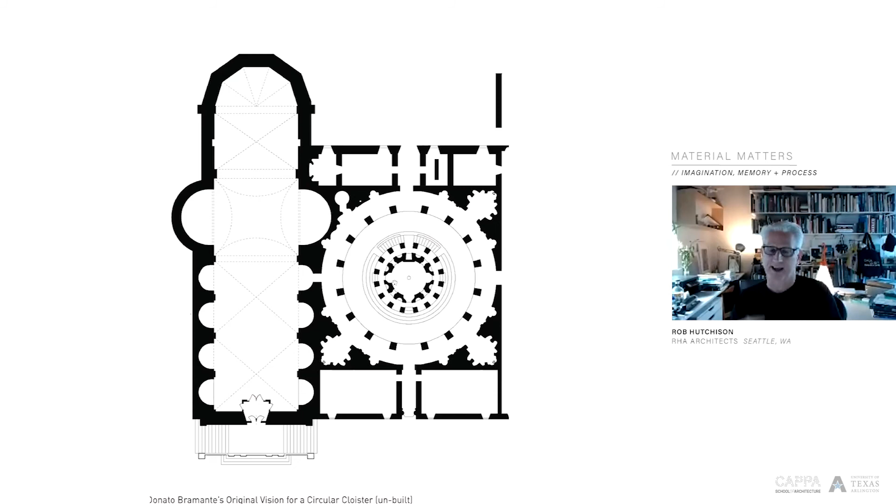But I was also intrigued, while in Rome, with the Tempietto, which I had always understood as this incredible isolated building sitting in a severe blank courtyard. Then I learned that Bramante's original intention was almost the antithesis of that—not an object building, but something that completely blurred the line between the cloister, an interior or exterior courtyard space, another cloister, and the chapel itself. That was eye-opening.

I think that definitely had a lot to do with Javier and I being inspired by Kahn's building, its program, and its relationship of spaces to each other, but also thinking about how this space is different from that space, which is different from the center space.

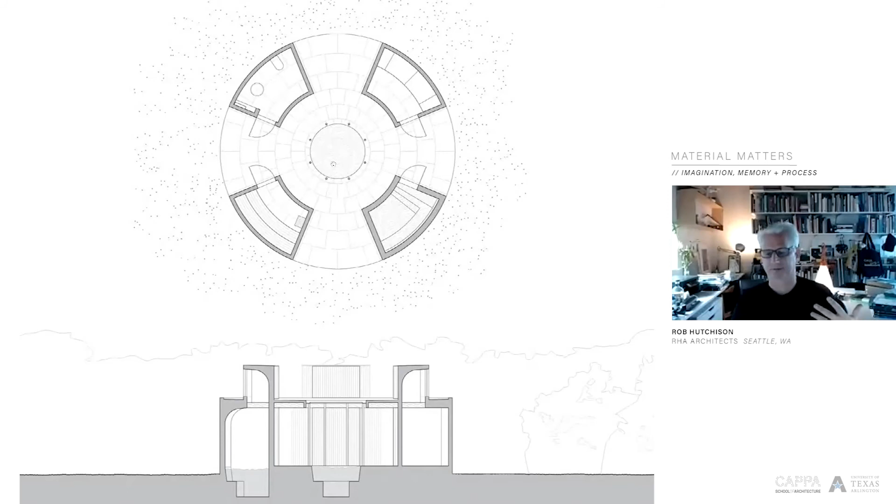I probably don't have time to talk about this because it's already 5, and I want to make sure I talk about the dynamic landscapes. I'll just briefly say there was an interesting moment during the exhibition where Javier and I went to Ceramica Suro in Guadalajara to look at tile, lots of different tiles for the bathhouse.

I realized the work they were doing there was incredible, and I wondered: what if for our exhibition we did a series of ceramic sculptures that reinterpreted the designs of all the memory houses, only as objects, only as formal qualities? That became a whole new design project—how do you take a lightweight shell building with thin columns and figure out a way to let it hover on a table and be a beautiful object in its own right.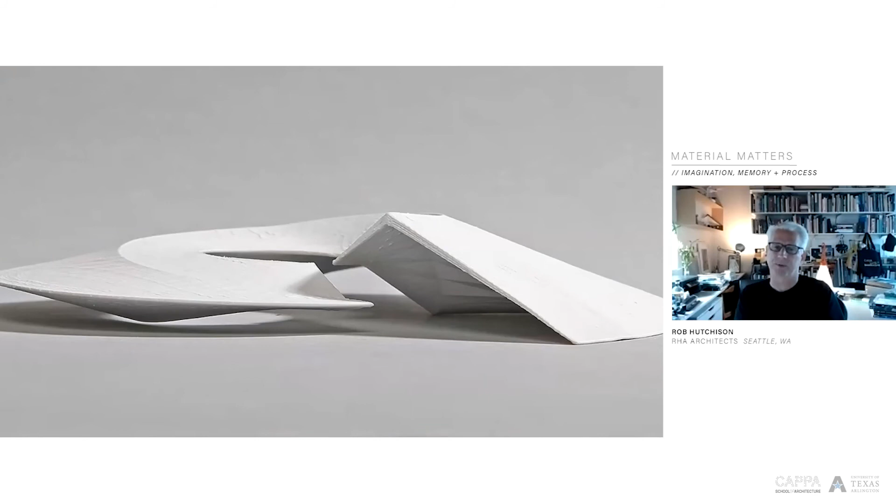This is the 3D printed final roundhouse that Xiaoxi did in my office, which took us forever to figure out. We ended up undulating the spine of the underside of it to allow it to hover.

These are all the casts done at Ceramica Suro that I saw when I visited right before they started casting—here's the negative of the positive, and this is the 3D printed model we gave them. We had to redesign all these buildings to be cast, which was interesting—getting rid of the tectonics, getting rid of the program, just looking at the form and thinking about how to redesign that and create something new. These are the final casts in the exhibition itself.

This is actually the last thing I wanted to present, a transition moving on from memory houses. The memory houses was an amazing project that so many people worked on, and I think really took us to a lot of places we never expected to go. After the exhibition and publishing a book about it, I think we finally got to the place where we felt like it was winding down.

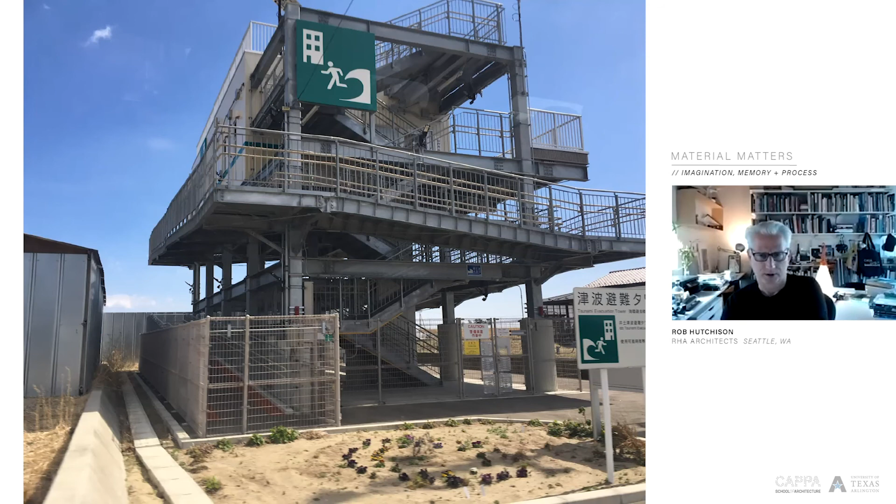The other thing that really hit me hard was the infrastructure they've constructed along the entire coastline—this huge wall right on the beach. Standing on top of it, it goes on forever. Just thinking about the impact of this, there are many ways of looking at it. There's a reason why it exists, and all of this has been built since 2011.

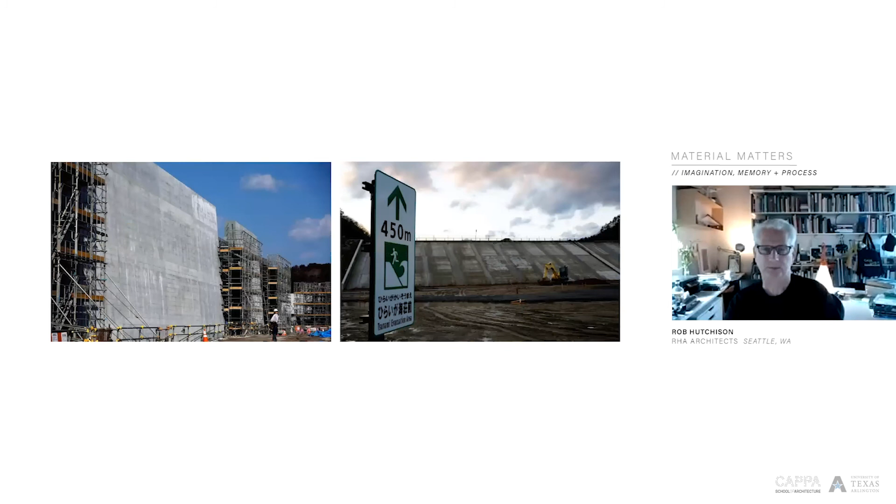I did more and more research, learned more about it. The other thing that really hit us was Osamu Tsukihashi's beautiful and poignant memory houses project. Osamu is a quite talented architect working out of Kobe. When the event happened, he and his students and many other colleagues were at a loss of what they could do. Everyone wanted to help, everyone wanted to do something, but especially right after the event, there's a question of what you can really do, particularly since they were in Kobe and this all happened on the coastline.

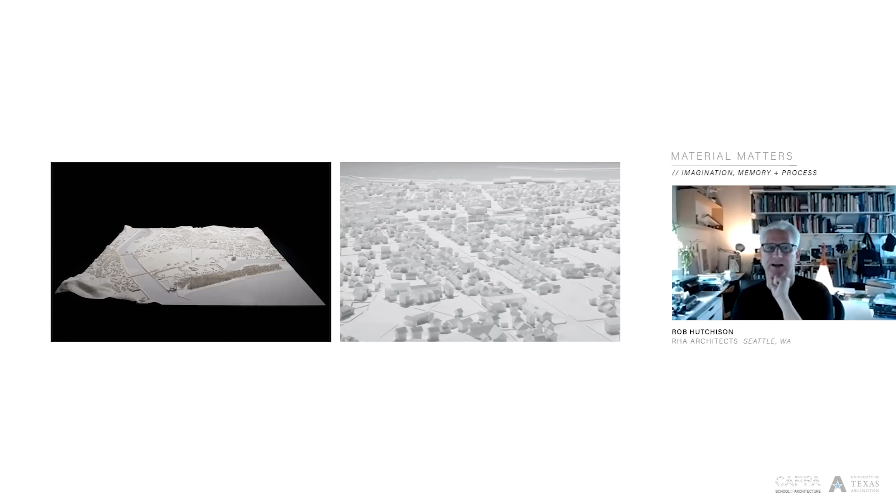He and his students came up with this idea—as you probably know, many of these communities were completely destroyed—so what if they recreated the community that no longer exists. They spent a fair amount of time quickly doing research using GIS and Google Earth, and created models. Specifically, they created a model of one community he knew people affected by, built out of little white buildings with topography, and gave the model to the community.

They didn't have any intentions of what might happen—they just hoped that somehow people would connect to it. What was interesting is that community members really did gather around and start talking about the place that used to exist. Their way of engaging with the model was creating little notes with memories of that place, so important to them—things like 'this is where I met my husband' or 'this is where my child played in a playground,' across the board.

I think for Osamu it was quite interesting, because suddenly it was like, wow, this is actually giving them a way, one level to grieve, but also to come together and talk about what used to be there, and in an interesting way talk about the future. What could we, now that we can understand what used to be here, as a community look at this place and understand it through the model. Could that be a way to start making decisions about what we do in the future?

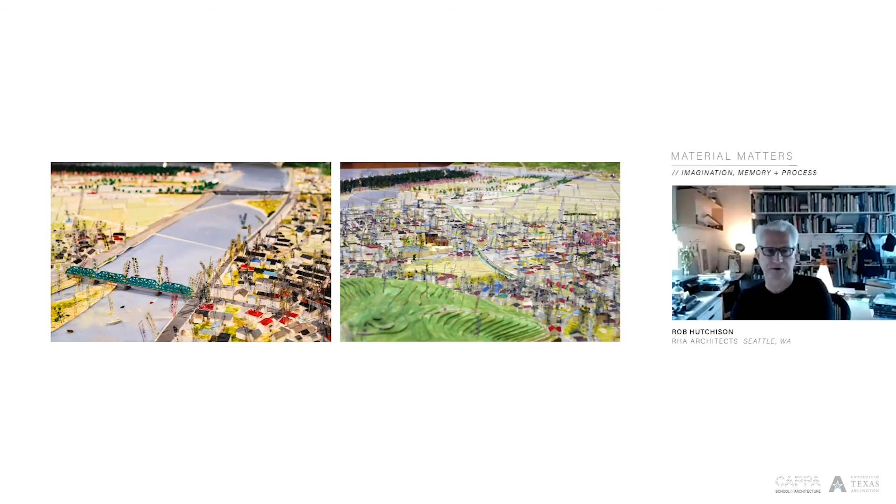I actually recently interviewed him, which was published in one of our local magazines. And that project, interestingly enough, connected us to the South Beach community of Washington State, because after I came back from Japan, I became interested in tsunami, particularly how it could affect our own coastline.

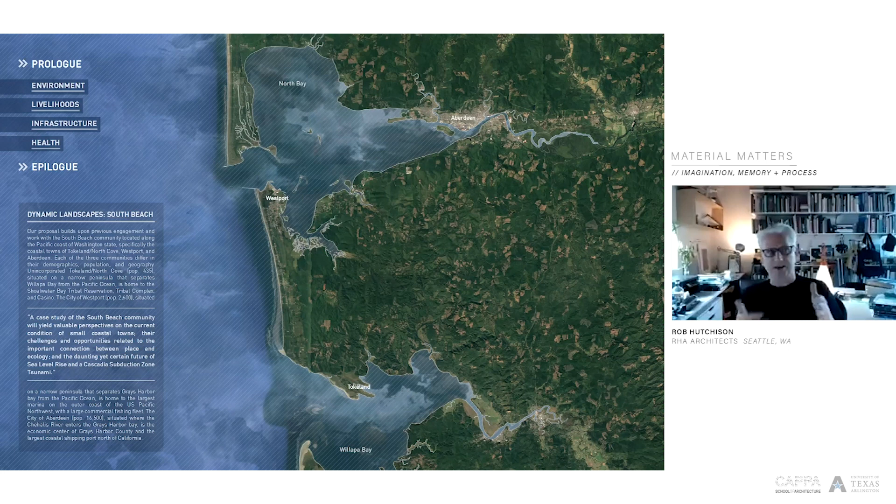Some scientists believe that over the next 300 years we're due for a 9+ earthquake and a tsunami similar in scale to what they experienced in Tohoku. So I started looking into our own coastline and what was being done to prepare, and submitted this project to the Architectural League's American Roundtable initiative, and we were one of the 10 teams selected.

So you're seeing a few of the sheets from our rough draft. This will be online hopefully soon. This is showing the tsunami inundation that would occur in the South Beach community, this long stretch of land here - this is Grays Harbor and Willapa Bay. A lot of the Washington coastline as well as Oregon coastline is quite susceptible to this.

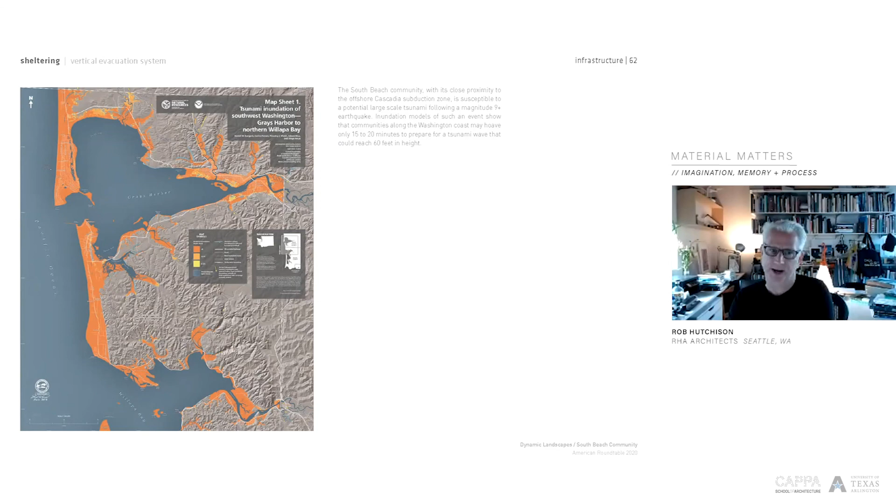There's been a fair amount of looking at this already, which I've done a lot of research on and connected with people that have already been working on this.

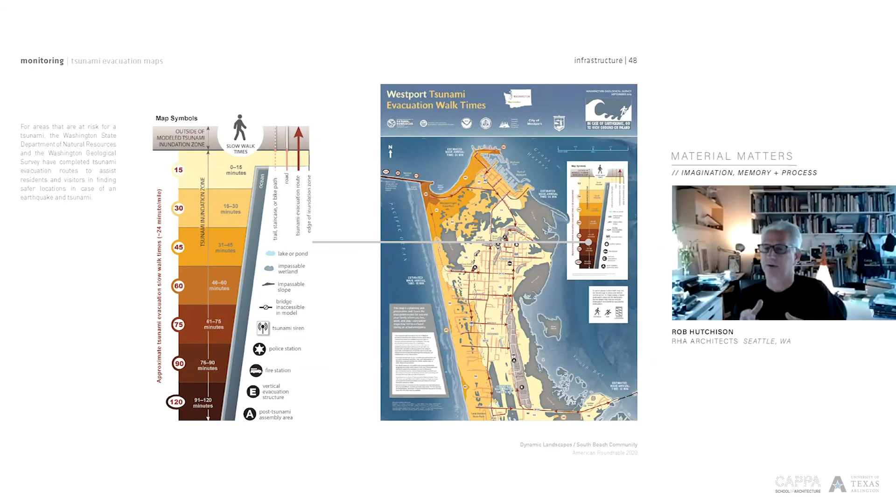The Washington State Department of Natural Resources and the Geological Survey have done incredible maps that talk about tsunami evacuation walk times, for the public to understand how long it takes to walk from here to high ground. That's turned into interesting scenarios, because if you have a 9+ earthquake, you're not going to drive anywhere. So you're going to have to walk, and these walk times make people realize they don't have enough time - in 15 minutes to half an hour - to get out of the way.

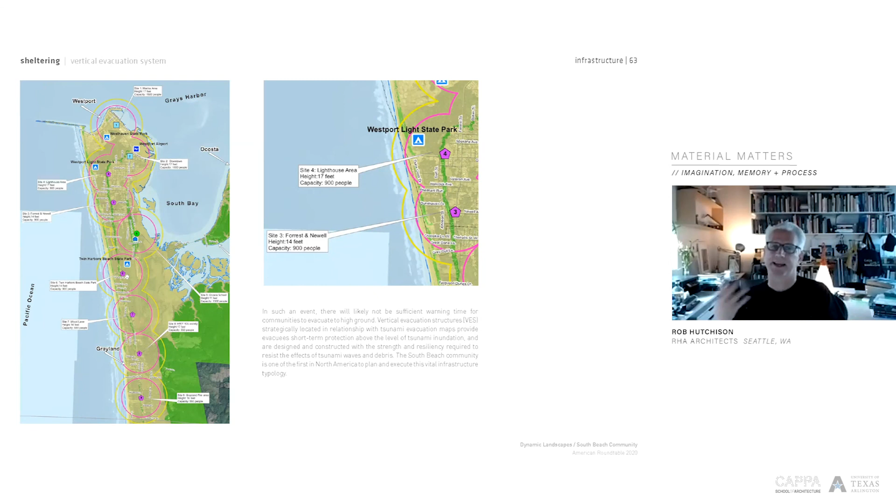So these circles - the centers of these circles - are where they feel they need future evacuation towers. So once again, connecting me back to my studies in Japan, this is actually the first vertical evacuation platform in the country, the Ocosta Elementary School, where they put the evacuation platform above the elementary school gym. This can take 2,000 people.

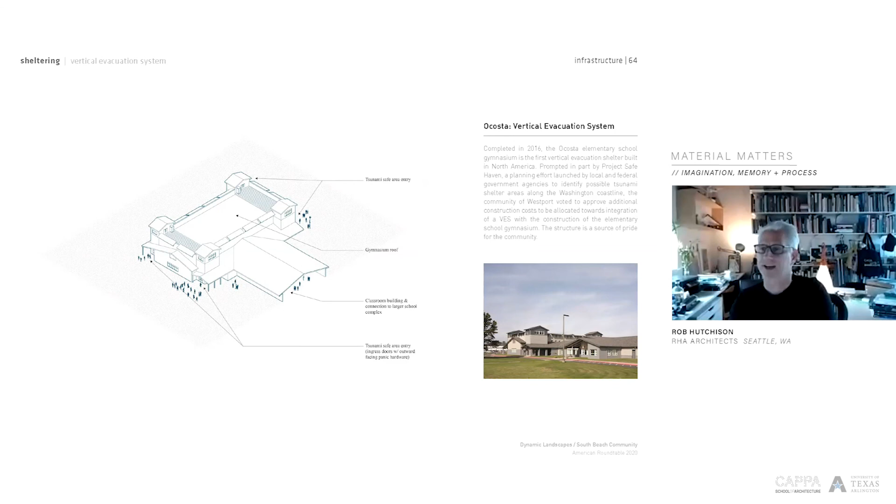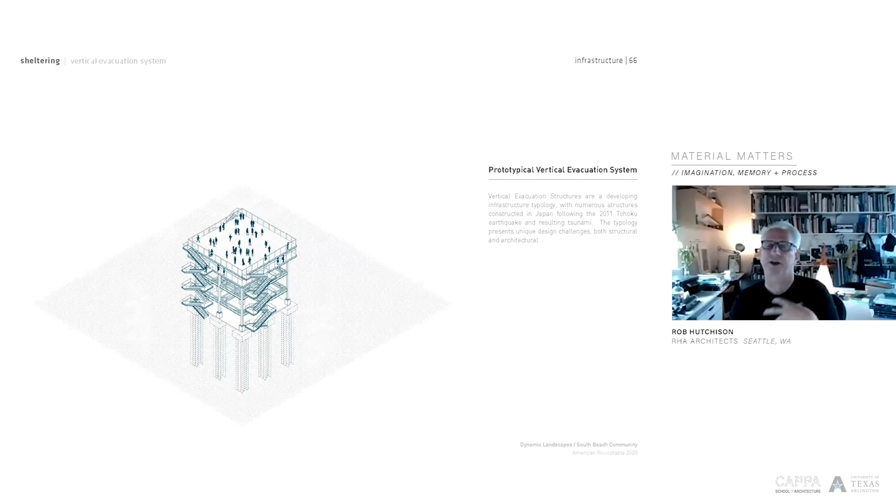By the way, these drawings are all by my colleague Corey Matthias, one of the contributors on this with me. But this is after the tsunami comes through - these have to be at a certain elevation based on the assumption of what the wave height is. And more prototypically, they're starting to look at a series of these towers throughout the area.

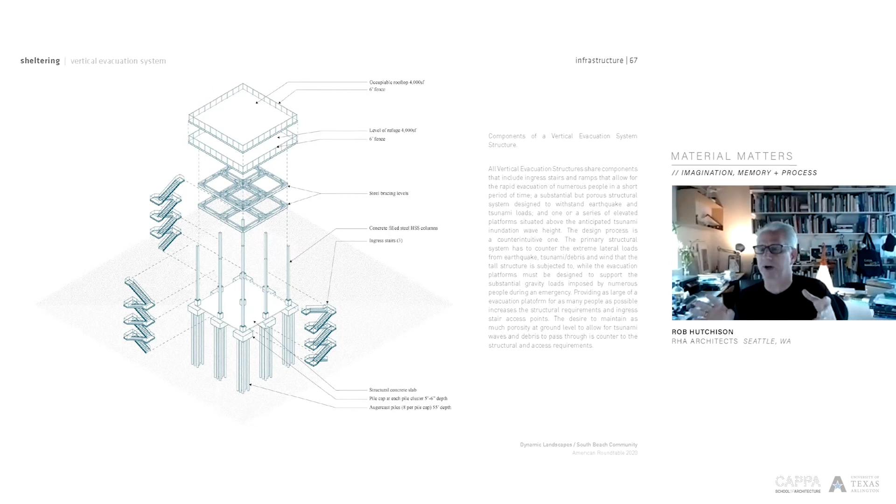So as architects, we've become very interested in these buildings and what the design issues are. This is an interesting typology, because you're trying to keep the building as open as possible at the ground level, but you're trying to support it as high as possible, and support 2,000 people on a platform. So you need structure to do that.

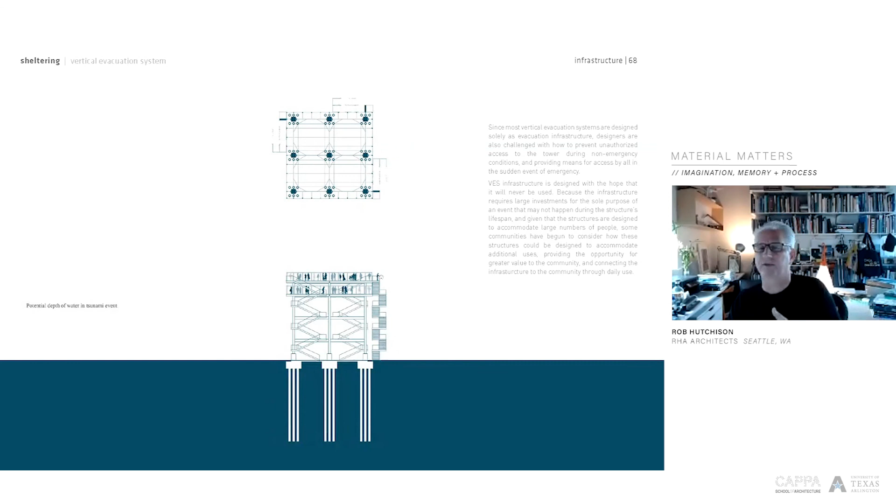So there's this counterintuitive design process, which I can't help but think is a really amazing opportunity - which brought me back to my interest in the tsunami infrastructure itself: how can we start thinking about these buildings as connecting more to the community, rather than being designed as singular buildings that serve only one purpose and might not even be used for that purpose. How could these two or multiple levels be used in ways that support communities on a daily basis?